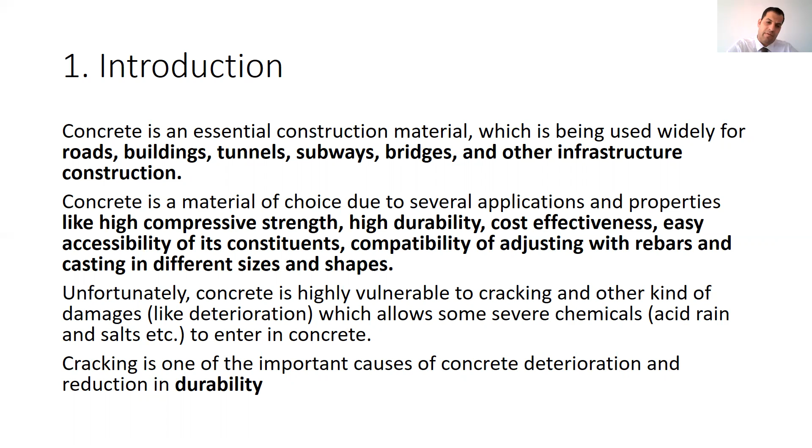So what should we do? Basically, one thing we do is regular maintenance and inspection, and if there is any problem, we stop it before it expands through the system.

However, this might be very expensive and costly, because sometimes we have infrastructure under the sea, or road infrastructure that if we want to inspect regularly, it can be very expensive and costly, requiring lots of money.

So in view of increasing cracking of structures, researchers invented a method named self-healing to overcome concrete structure deterioration. Self-healing is the best method to reduce cracking because regular inspection and repair maintenance is impossible for massive concrete structures due to large requirements of labor and cost.

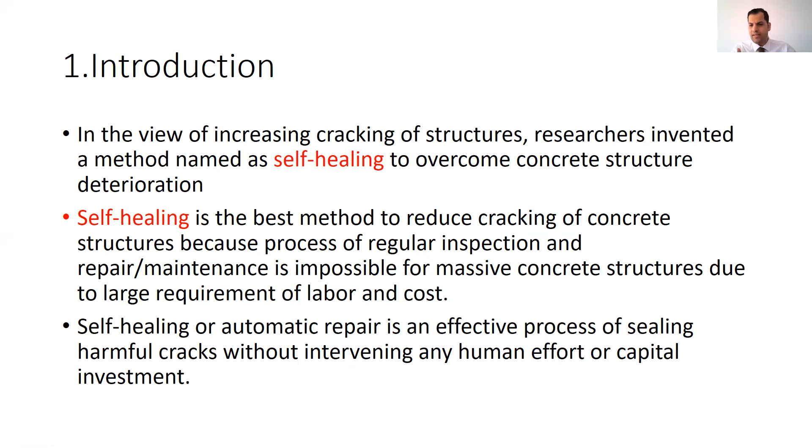Self-healing, or automatic repair, is an effective process of sealing harmful cracks without any human intervention or capital investment. So without inspection or maintenance, we want to create an automatic system so that whenever any crack happens, it could automatically be healed.

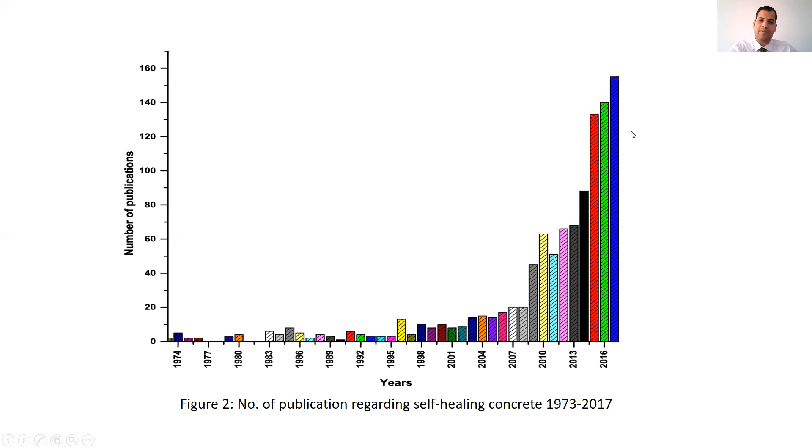Here you can see the number of publications from 1973 to 2017 monitored in this figure, and you can see how the number of publications has increased, showing the growing importance of self-healing methods for concrete.

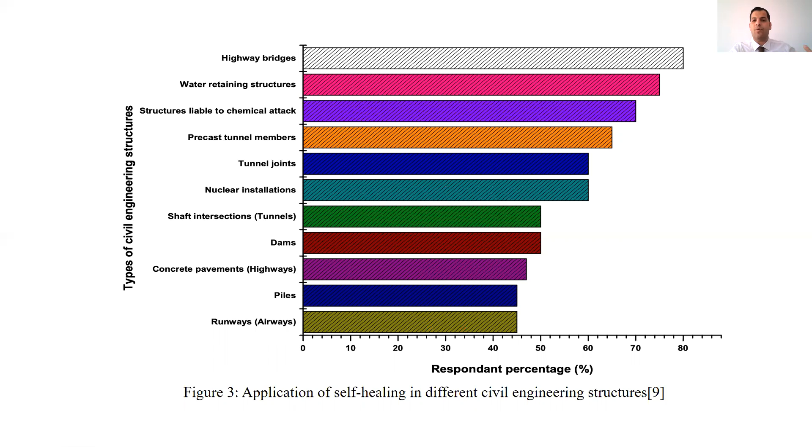So basically this method has been applied for infrastructure or structures which are very important for us, and we should be careful because these are part of our infrastructure system and relate to many important things for a country or state.

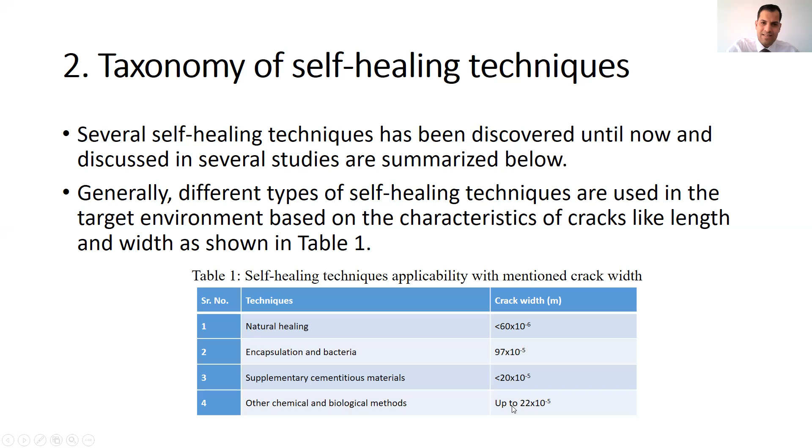The first type is autogenous, or natural, healing. Almost 20 to 30% of cement in conventional concrete remains unhydrated. So what happens if concrete starts to crack? Unhydrated cement particles react with ingress water, and this hydration closes and blocks the crack that happened.

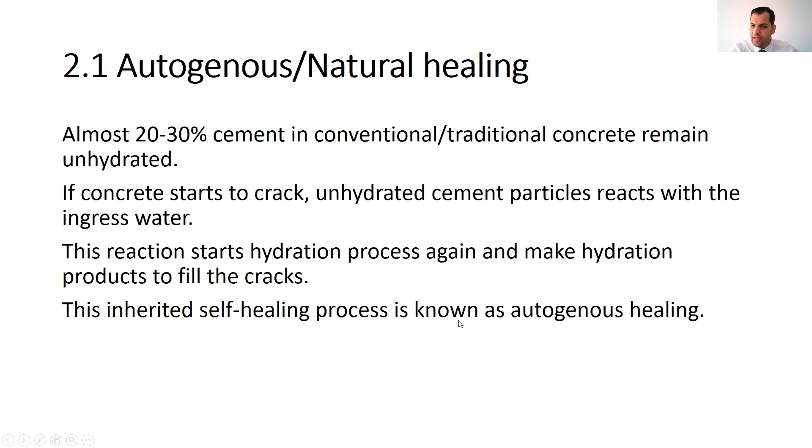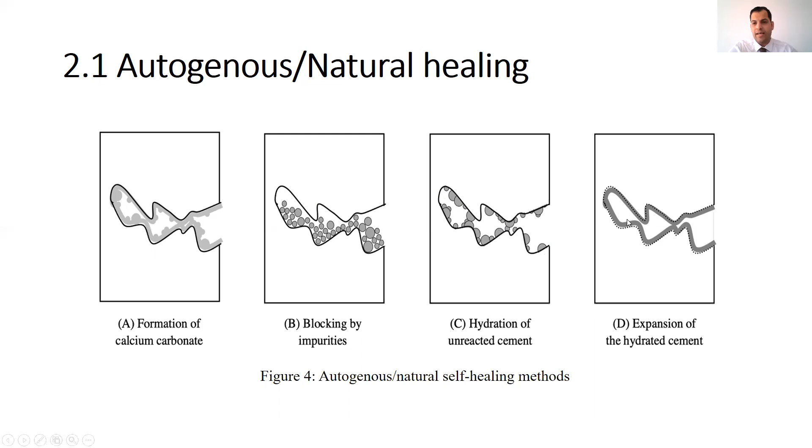This inherited self-healing is known as autogenous healing, which naturally happens in the concrete system. There are 4 parts: the formation of calcium carbonate, the blocking by some impurities, and the hydration of unhydrated cement. When the unhydrated cement reacts with water, it expands, and this expansion closes or blocks the cracks.

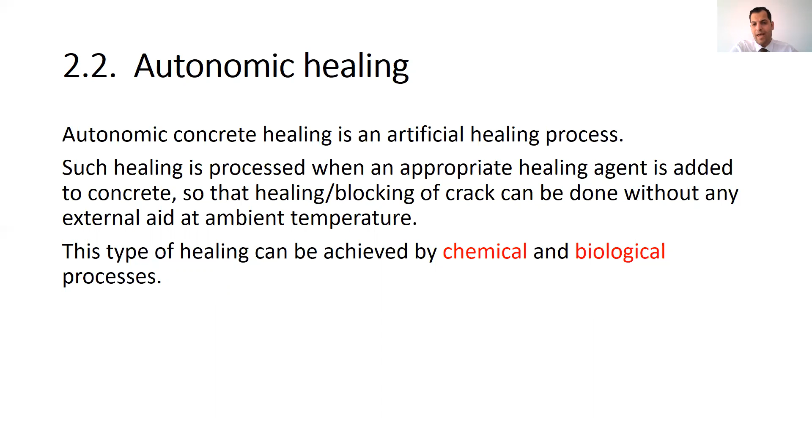Autonomic healing is an artificial healing process. Such healing occurs when an appropriate healing agent is added to the concrete, so the blocking of cracks can be done without any external aid at ambient temperature. This type of healing is achieved through 2 processes: chemical and biological.

Let's go over chemical self-healing. This is an autonomic healing type of concrete carried out by incorporating chemical compounds into the crack. Chemical self-healing concrete can be made by mixing fresh concrete with chemical reagent liquid like glue. There are many processes to accomplish this, such as hollow pipette and encapsulation methods. There are 2 methods of chemical self-healing: active and passive mode.

The difference between these two modes is that active mode needs an external supply of chemical reagent, contrary to passive mode. So for the chemical healing, there are two parts: passive and active. The active mode works from the beginning, however for the passive mode, when the crack happens, it converts to active and starts crack blocking.

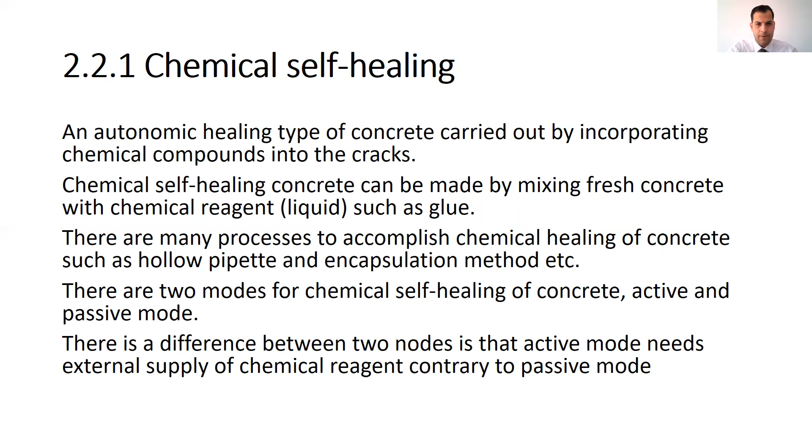Another one is biological self-healing. Biologically healed concrete is an environmentally sound process that can be achieved by using microorganisms in designing self-healing concrete. The reason behind choosing microorganisms is that they can grow everywhere, like in soil, acidic springs, water, oil reservoirs, and different situations and positions.

Generally, there are 3 types of these microorganisms: bacteria, virus, and fungus. Out of these, bacteria of a special strain are the most effective. So when we talk about biological self-healing, we are basically talking about the bacterial type, because bacteria are more compatible with the situations that concrete might face.

In this process, microorganisms are incorporated into concrete through various methods, for example incorporation of microbial in fresh form concrete, in sporous form, immobilized form, and silica gel, in the form of encapsulation, and by using the vascular network method.

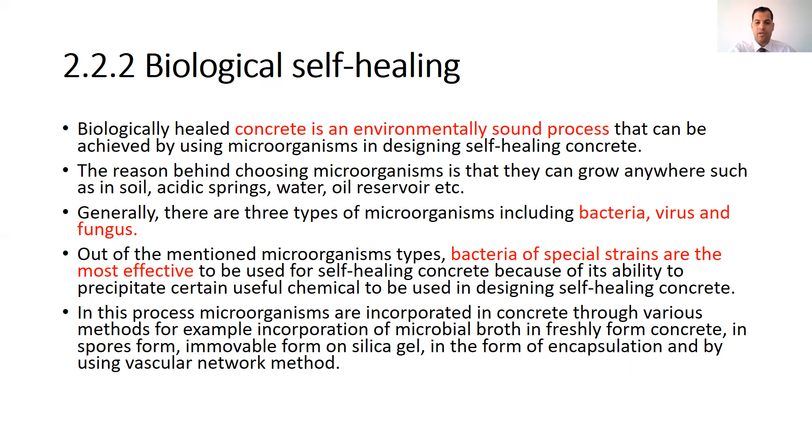Another way is engineered self-healing. Various methods of engineered self-healing of cracks in concrete have been explored so far, which depend upon the crack width. Again, crack width is one of the important parameters we should consider for our case. Apart from engineered self-healing concrete, many self-healing concrete techniques have been explored, but practical remedies are still unavailable.

For example, the bacteria approach is an effective method, but it might be expensive, and some bacteria might be killed during the mixing of the concrete. We have to be careful because concrete has a high pH, so if we add bacteria directly to the system, most of them will die. Since the bacteria need to stay alive, we should be careful about the environment we are providing.

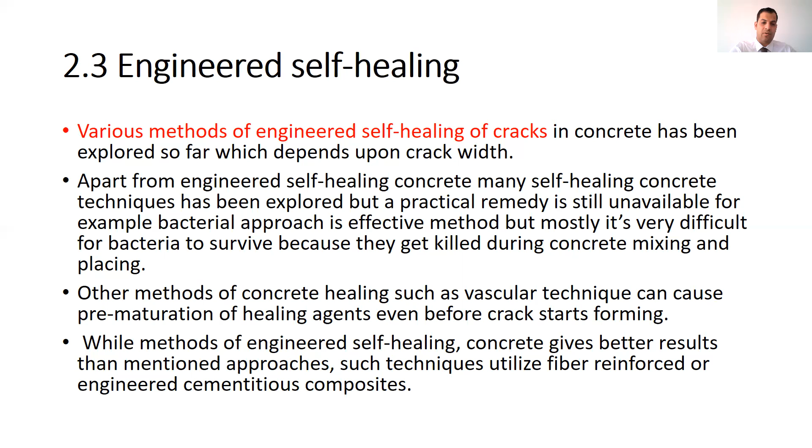We have another method of concrete healing, such as the vascular technique, which can cause premature activation of the healing agent even before the crack starts forming. While methods of engineered self-healing concrete give better results than the mentioned approaches, such techniques utilize fiber reinforced or engineered cementitious composites. Another method in engineered healing is encapsulation.

Encapsulation is the most common and effective method to introduce healing agent into composite materials such as concrete. We encapsulate the system, the bacteria, the glue, whatever we are going to use, and when the crack happens, these capsules break and the material inside is released, starting the healing procedure we expect. A variety of materials are available to make healing agents and capsules depending upon desired efficiency.

Successful encapsulation technique is possible only if the mechanical resistance of the capsule overcomes the internal forces of the concrete mixture. Assume we use very strong encapsulation, and when the crack happens, the capsules do not break - then what happens? So the resistance of the capsule should correspond to the resistance of the concrete and materials we are discussing. This technique is capable of extending the active duration of the releasing pattern of chemical or biological healing agents in concrete.

A lot of research suggests that this process is versatile and effective because of its efficiency to regain concrete properties like mechanical and durability. Additionally, encapsulation techniques face repeatability challenges as concrete structures get damaged multiple times, and capsules deliver a limited amount of healing agent in the crack.

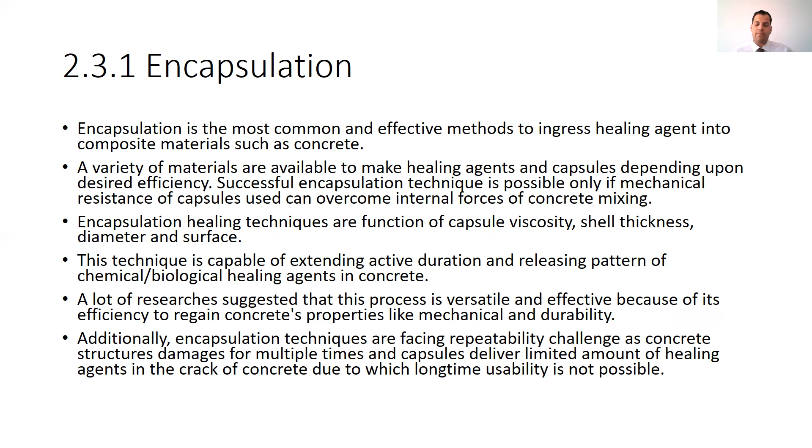However, researchers are still working on this and trying to make different types of capsules with different properties that might be applied for a longer period.

Depending upon the location of dispersion of the capsule, encapsulation techniques are classified as tubular, glass, and micro capsules, or different positions based on different types of material.

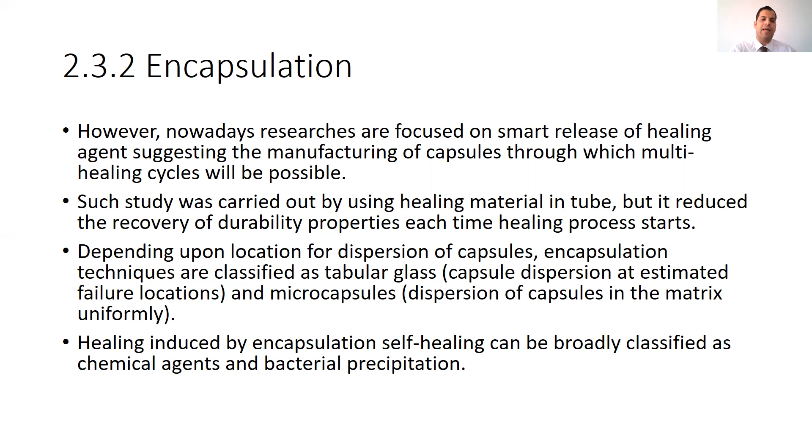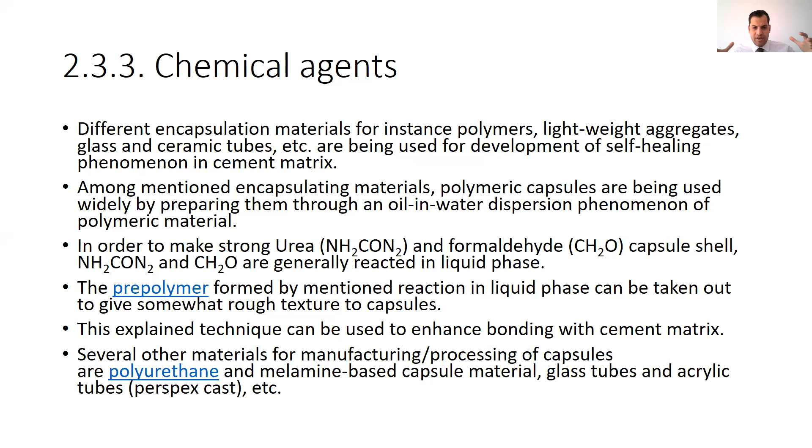Healing induced by encapsulation self-healing can be broadly classified as chemical agent and bacterial precipitation. For the chemical agents, we put some chemical material after breaking these capsules. They release, and this chemical material will react with the existing material of concrete, and we might have some CSH that will heal the crack.

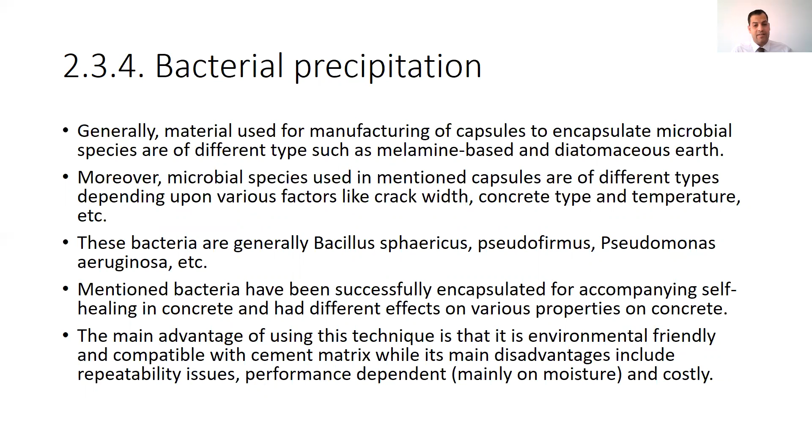Another one is bacterial precipitation. Again, after breaking of the capsules, the bacteria will spread into the system, and they might precipitate calcium oxide, which will react with the silica, and finally CSH gel in the presence of water will be created and will block the system.

So this is one example you could see. These are the capsules in here. After the crack happens, these capsules will be broken. After breaking, precipitation might happen, and with the existence of water and silicate, the CSH gel will be created and it will block the cracks.

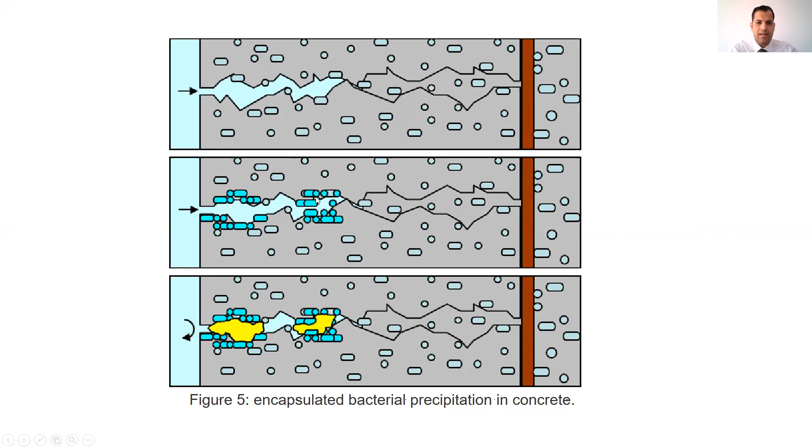So it is very important, guys, as we are limited in time, that I draw your attention to the selection of self-healing techniques. We have different types of techniques: bacterial, admixture, autogenous.

Basically, we are facing situations exposed to water. If exposed to water, bacterial, admixture, and autogenous techniques need water in the crack for the healing action to proceed, which makes these healing techniques best suited for a structure under water.

But self-healing due to adhesive agent is not recommended for structures under water, because water present in the crack stops the adhesive agent from being released into the crack and getting hardened.

Moreover, for underground structures, all healing techniques can be applied, but if the water table is high, self-healing due to adhesive agent is not recommended. If we are facing water, we should not recommend the adhesive agent, because it will be soluble and then it will not work properly.

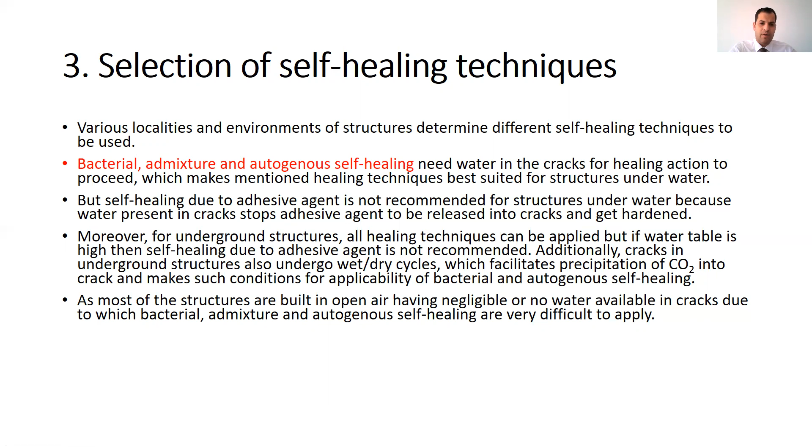As most structures are built in open air, having negligible or no water available in the crack, bacterial, admixture, and autogenous self-healing are very difficult to apply.

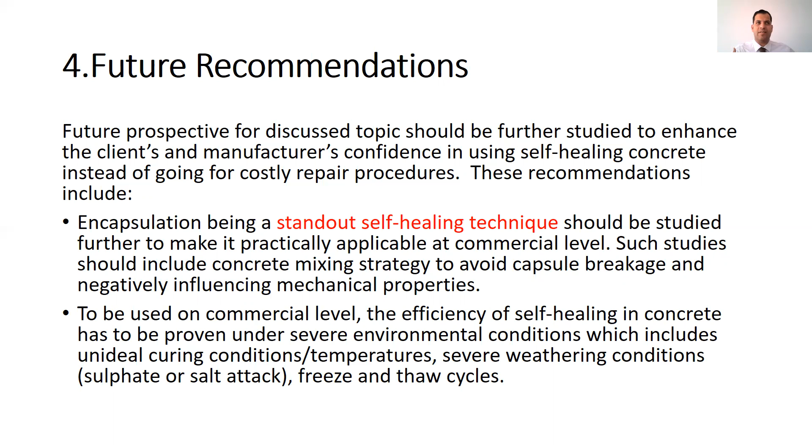The efficiency of self-healing in concrete has to be proven under severe environmental conditions, which includes unideal curing condition, temperature, severe weathering condition, sulfate or salt attack, and freezing and thawing cycles. Sometimes if we face freezing, thawing, and other severe conditions, self-healing concrete might behave differently.